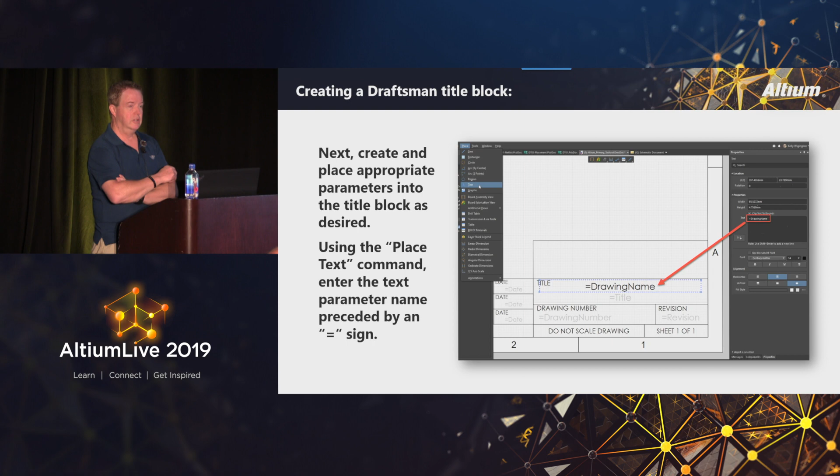Now, you'll want to do your zones in there as well. Oh, let's first talk about the parameters. Add the parameters to your title block template so that everything is formatted there, the size, the font, location, everything that you want. You want to put your parameters in there, of course, with an equal sign so that you can fill them in a tabular format, which we'll see later, rather than having to enter them on each individual sheet as you might otherwise.

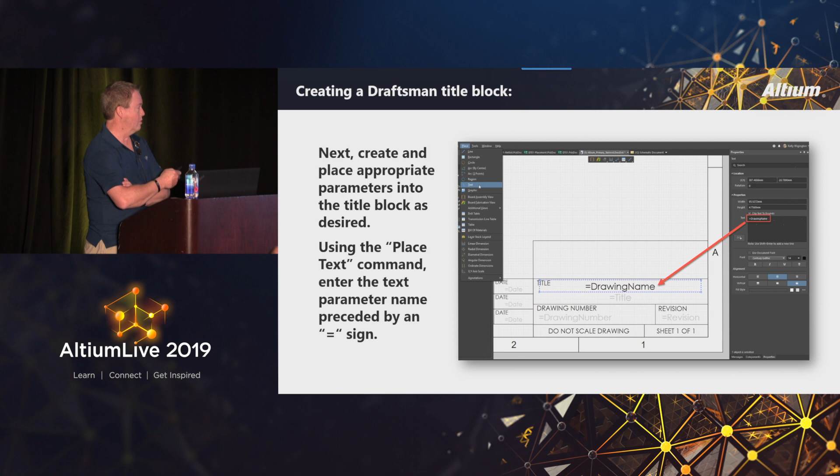All right, now, when you add your own custom parameters, and we're going to talk about there's four different kinds of parameters. You can use system, project parameters, such, but if you're doing your own parameters, this is the Windows dialog box that you use to do so. And, oops, I hit the wrong button.

Up here, you just put in an equal sign. You first click on this little icon here. That gives you a field where you put in the equal sign. It'll show you the system parameters that are available, project parameters that are already available and built in. You want to avoid using duplicate parameters because that can cause some confusion down the road. So first check and see, like in this case, where we're putting in a revision, check and see if there's already a system parameter revision in there so that you don't duplicate it as a user parameter.

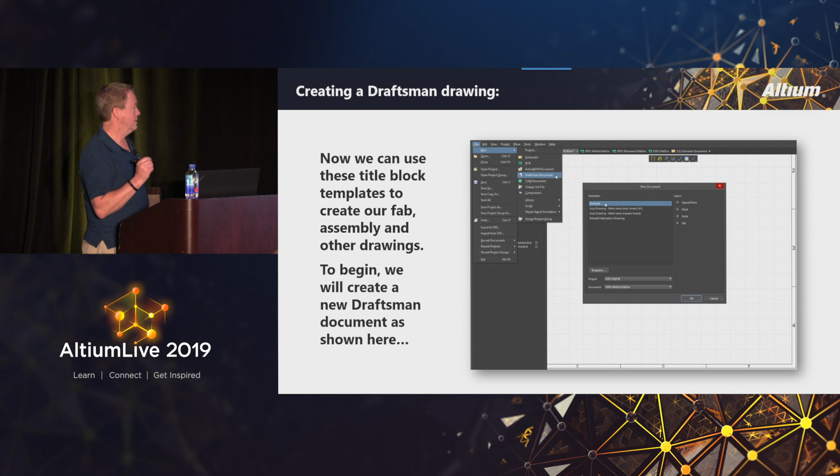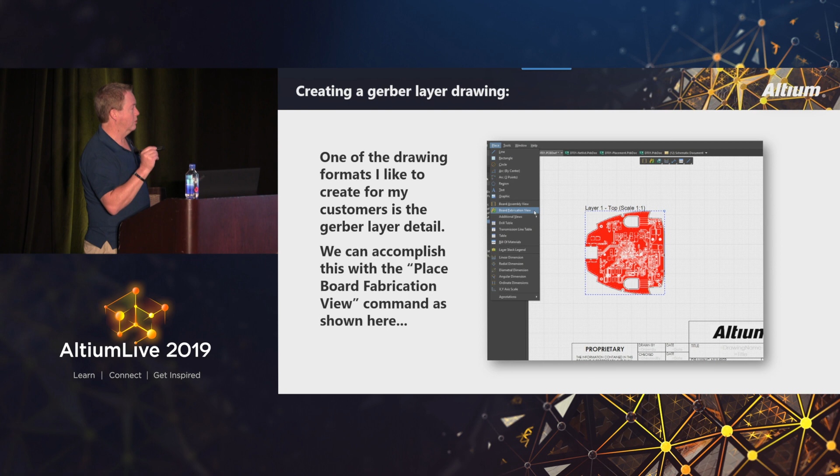But first we're going to do kind of our Gerber Layer stack up here. So we just say place and board fabrication view. That's a little bit misleading to me, but anyway, that's how you put in one of your board layers. And then in the next screen, we have, okay, interesting thing, most of you already dealt with this.

When you're in Draftsman, the property format is a little different than we're used to otherwise from the pull-down menus at the top. You control everything from these properties over here on this list, and there's so many different options. You just need to go in and kind of kick the tires and try different things out to see what works for you.

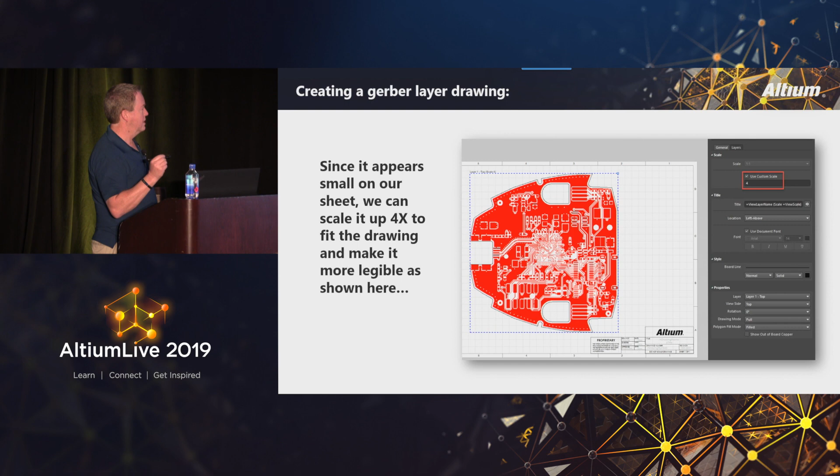Here what we've done is we brought it in at a 1-to-1 scale. It didn't fit our sheet very well. We're going to increase the size to 4x scale so that it fits our sheet. And then the next thing we're going to do is, if you like black and white documents, which is pretty typical if you're going to replicate them, you go into the second tab here in your Properties dialog box.

Gosh, I'm really shaking today. I guess I must be nervous.

And you can go change the color to black or any other shade that you want to. So if we call this our Gerber Draftsman document, then this is showing what our top layer Gerber is going to look like to the fabrication shop.

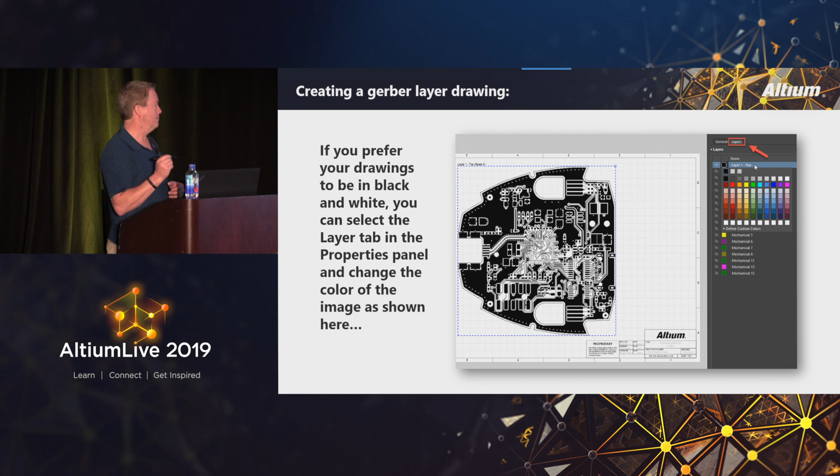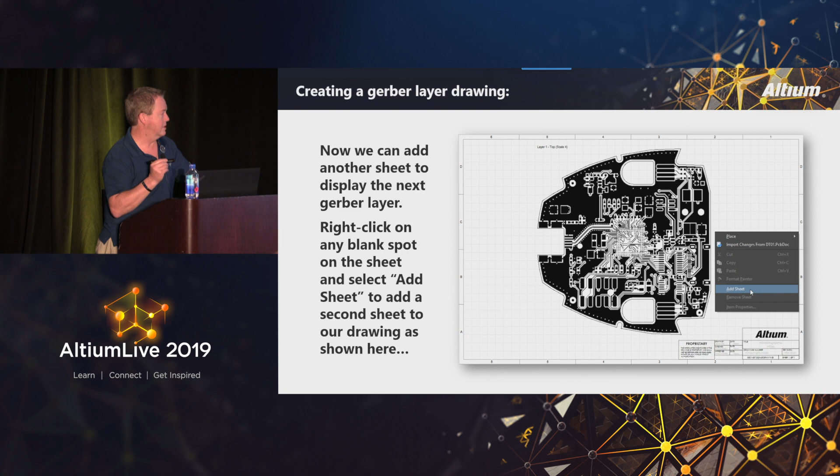Next thing, we want to do a second sheet for our other subsequent layers, and we just click anywhere in the white field around this, and the pop-up context-sensitive dialog box pops up, and we just say add a sheet.

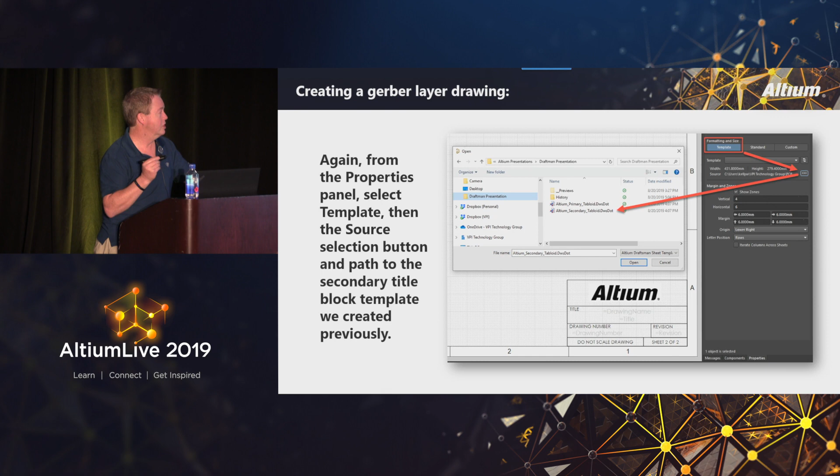So now the second sheet appears, and now we have to go back in and say, okay, I want to link my secondary title block template to my second sheet and those subsequent. So we go in and just change that in the parameters. It's going to be in the sheet parameters here that you can do that. And now you can go back to the menu and say place another fabrication detail.

It's easier, now that we've already sized it, to just copy the top layer that we placed previously to the second sheet. It's already the size we want. And then we just go in here in the properties. Notice I've got this selected. From the properties, we can go in and say, okay, now I want to see layer 2 ground.

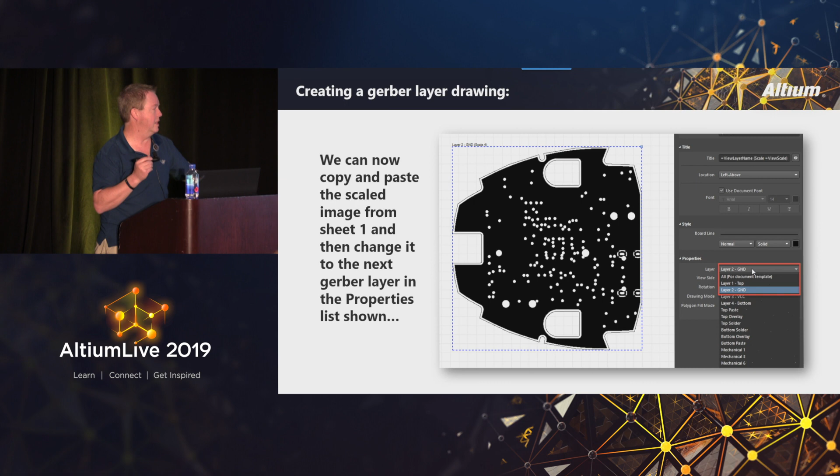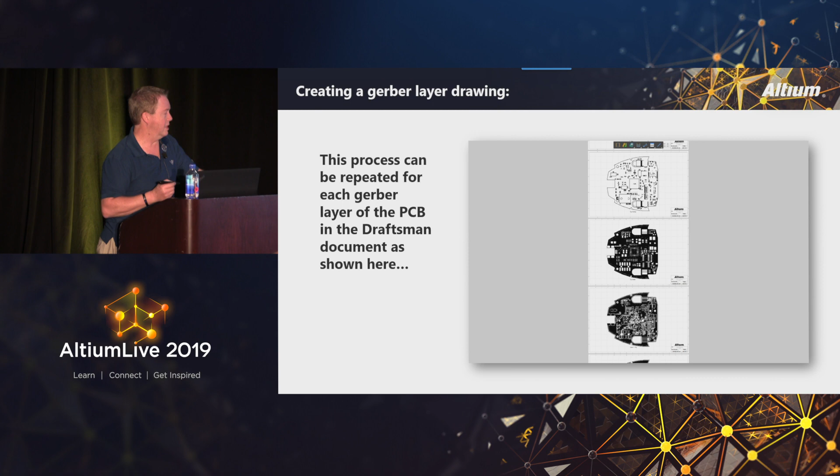And we just repeat that process for the rest of the Gerber layers in our board, so that anybody who views or prints that out can just see what our stack up looks like from silkscreen, solder paste on down to the bottom silkscreen. So that makes a useful drawing for someone to just inspect all the Gerber layers in a hard copy or a PDF. Okay, that's all there is to that.

Now we're going to populate the title block fields. You're maybe familiar with, for the sheet parameters, you just will do those from the properties box that will pop up here on the right. If you want to do them globally for the entire project, all the documents, then you go back to the top menu, project, and project options.

This is where we have all these different tabs. You go clear over to the parameters tab over here, and now it'll first present you with a blank screen here. You simply add a parameter, and you need to make sure that these match the same text spelled out exactly as you created them in your template.

So if you see, the drawn by and date code down here, they have to correspond with what you add up here. And then once you add those, you can go ahead, put the values in here, and they will appear on every sheet in every drawing that you have linked to that particular project. Really quick, easy, helpful thing to do. Yes? You can also copy them from a previous project as a block and paste it. Just do a Control-V. Okay.

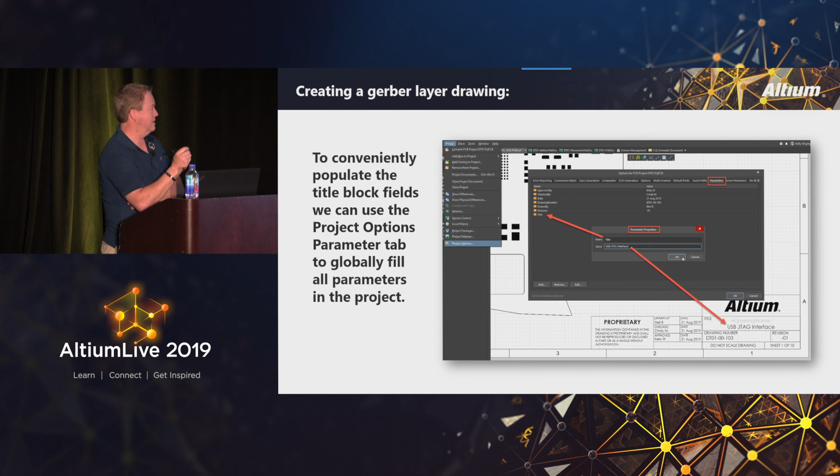Okay. And as I mentioned, because this one is not sheet specific, but document specific, we title this Gerber Layer. If we put our title in the project, as I just demonstrated, that title would appear on our fab drawing, our assembly drawing, all those. So that's why we have this one just separately here in our parameters panel for this particular sheet or document.

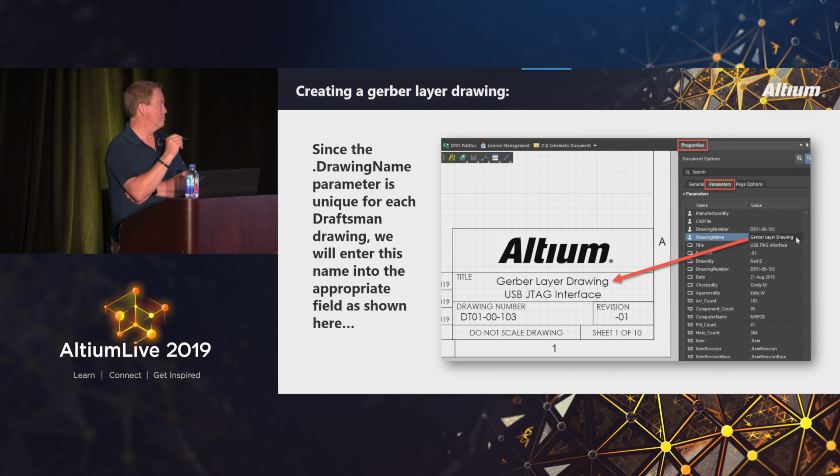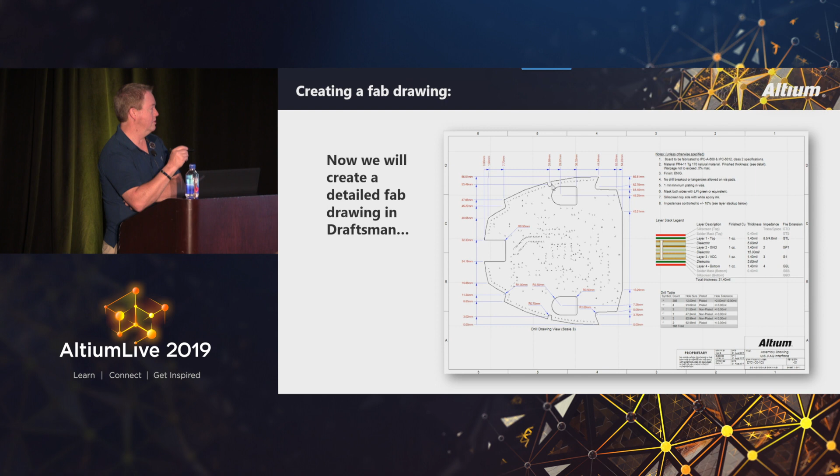Okay, now let's create a really nice fab drawing in Draftsman. Now, this is the format that I like for my fab drawings, and I'm going to show you how to accomplish that. So first, again, we start out with a blank template, and you can use that place Draftsman document command that I showed earlier. From now on, if I just did my Gerber drawing, I would just copy it, save it as my fab drawing, and then I would delete out all the layers in there, and then just go and create my fab drawing in there.

Now you see here that I have gone in and changed the parameter for the document as the fabrication drawing. And now we start out by placing, under place additional views, the drill drawing view, and that places a replication of our PCB, and it has symbols or characters representative of all the drilled holes we have in the PCB. I'll show you how to manage those later on. Again, I just did this 3x scale so that it would fill the sheet where I wanted it to.

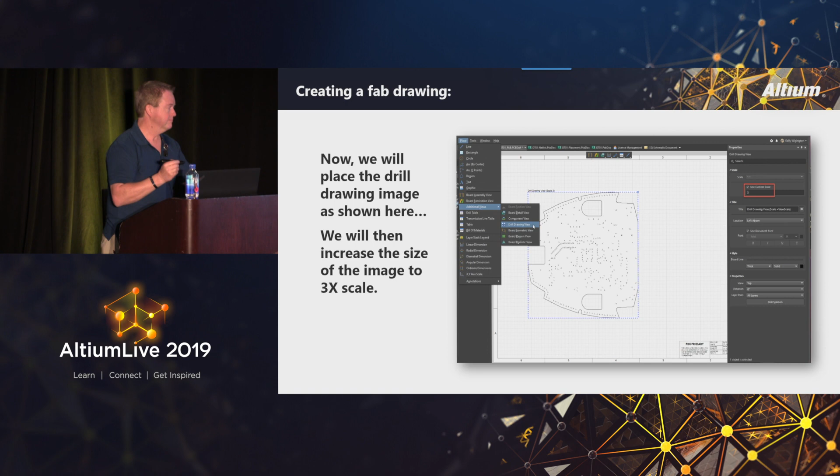Okay, next we want to dimension the drawing, and you have a lot of different dimension options in here. I like the ordinate dimensions where you start at a 0 point and then just work your way up. It's a little cleaner when you have a lot of notches and edges to dimension in your drawing. You can also do radial dimensions, all kinds of things. Just go under place, and these are all the dimension options that you have down here.

Now, the interesting thing that sometimes gets you when you place a dimension is it may say 0 on a couple of them, and then 1, 2, and you go, wait a minute, I need some resolution here. So by default, it just puts it in with no numbers behind the 0. So then you need to go here in this menu and change it to a precision of 2 or 3 decimal points, depending on if you're dimensioning in inches or millimeters. You can also do dual dimensions, inches and millimeters, and set the precision independently for each one. But it really gives you a nice detailed dimension drawing.

You can also reset your preferences. You can go to preferences for this particular menu and reset it all there. Thank you. Yes. Go to your preferences under Draftsman, and you can set all the default preferences you want, and then that saves you the trouble of having to mess with all these every time you create a new dimension drawing. Thanks for that.

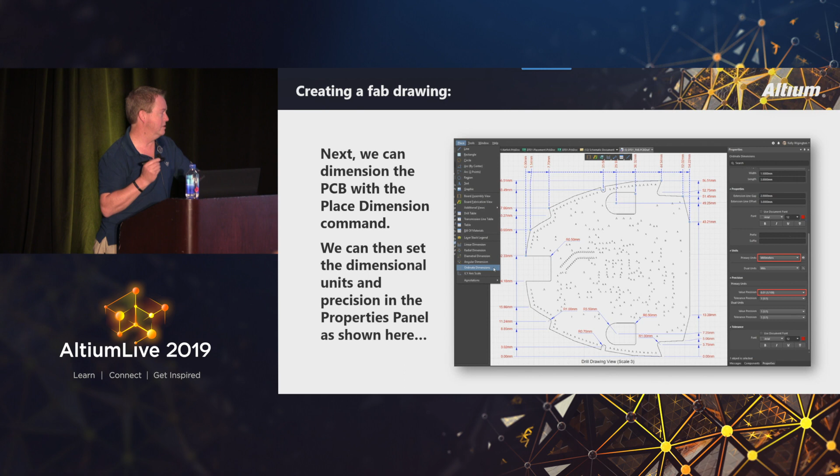Okay, now we want to add our preferred fab notes here, and this is pretty easy. You can copy and paste your favorite notes in there. The one thing that's kind of unusual about this is that you need to paste them in line by line down here. You can't edit them up here in the text box. You have to add them bullet point by bullet point down here in this dialog box. But it does space them nicely for you, gives them numbers. You can add circles or triangles over your numbers so you can reference other details if you want to. But just copy your standard notes in there and you're off and running.

Okay, now here is the layer stack table. Place, layer stack legend. This is the default way that it comes in, and as I pointed out, again, you see a lot of zeros in here, and you're like, wait, what's with my thickness? That's just because the default doesn't contain any decimal precision on that.

So once you place it, you can go into the properties for that and you can set a lot of different options. Go in and set your precision. Also for the different views, you can set it to a compact view, which instead of a big tall sandwich, kind of compresses it down. It automatically spreads these lines out here with all of your descriptions for the layers.

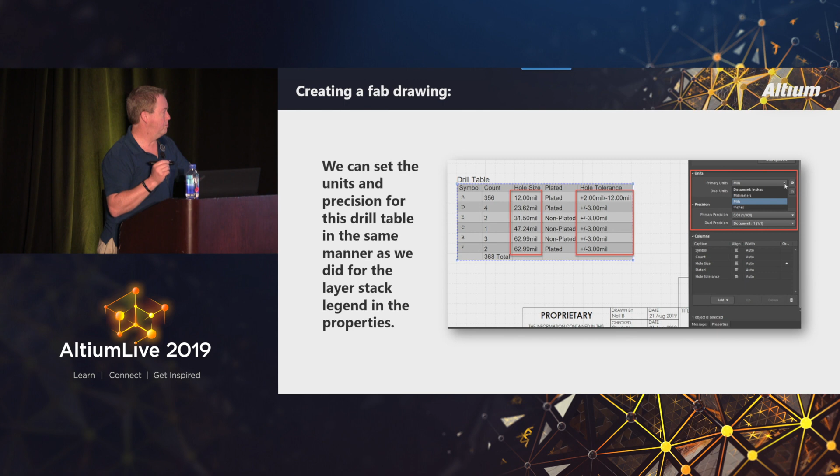Okay, now the options that you have for your drill chart or table here is you can go in, click on this link, it'll bring up this dialog box. You can go in and group by these different options here. You might need to just experiment with a couple of different things till you see the sorting and the order and the columns that you want. And then it will, by default, come in with a lot of crazy symbols in here.

Symbols are useful. I prefer to use alpha characters, so I go in and select them by size and then change this for the symbol from just a star or whatever to an A. That way, if the fab shop calls and says, hey, we've got a problem with this particular drill, they can reference it by an alpha character, rather than saying this crazy octagon-shaped star-looking thing. So that's my philosophy there.

I have a quick question. Yeah. So I may be misremembering this, please correct me if I'm wrong. When I place a drill table into Draftsman and it auto-generates symbols for it, I've noticed, at least on mine, that when I place another drill table in the PCB space itself, it auto-generates a different set of symbols. I know you can manually change those symbols. Is there a quick easy way to make sure those symbols are in sync? Not that I'm aware. Is there anything in preferences that let you do that? I haven't found any other way.

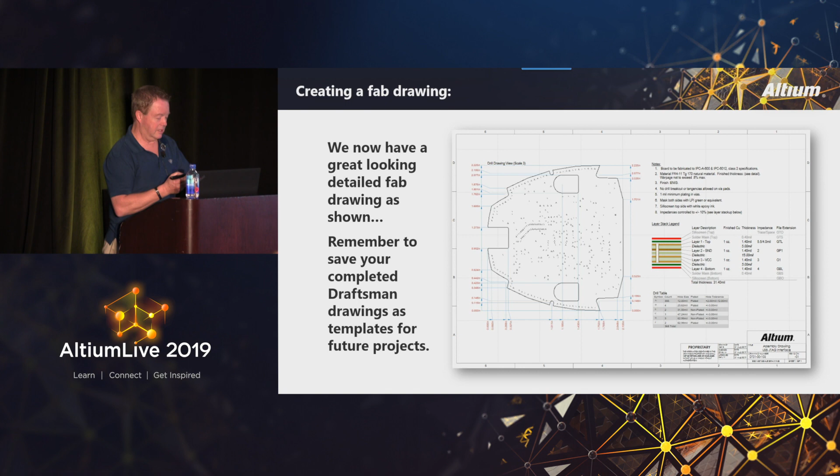Okay, so now we have this great looking fab drawing, and I'm quickly running out of time, so we're gonna go over to the assembly drawing. This assembly drawing is great. I love it because like many of you, we've had to use a mechanical layer to do a duplicate silkscreen outline for all of our components with an embedded reference designator in the middle so that when we create our assembly drawing, we can have all the designators appear at the centroid of those components.

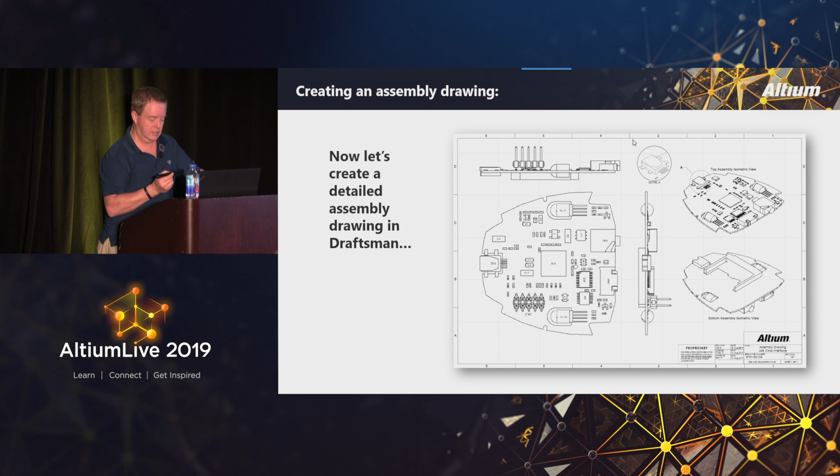Now, with Draftsman, you no longer need to do that mechanical layer for your outlines. You can use a couple of different things. I'll show you here in the next slides. Again, we're just going to update our parameter here to say assembly drawing. I've just copied the fab drawing, called it the assembly drawing document, and then we're going to just update our assembly information here. So now we do place, board assembly view.

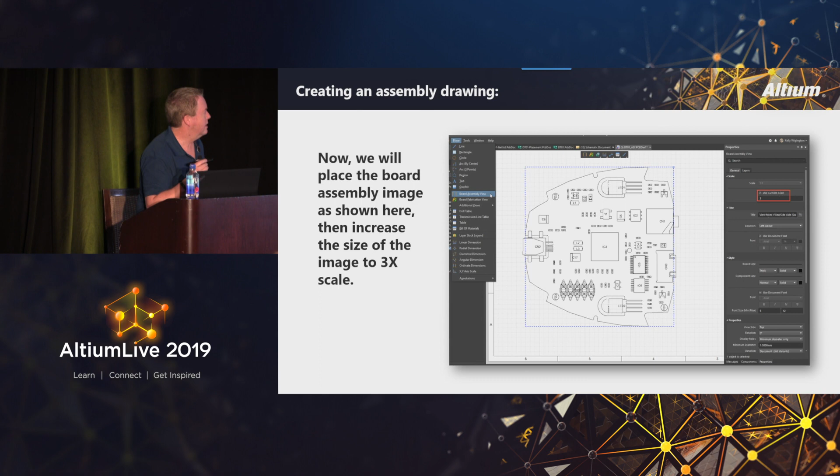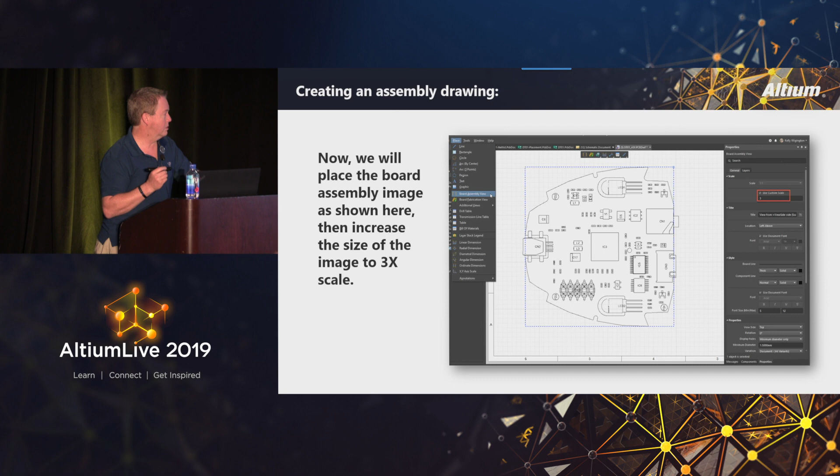It comes in just like this. Mostly it'll look pretty good. Some situations that we're going to look at here, there will be some problems that we need to take care of. I increase it to a 3x scale so that it appears large on the sheet.

Now, how many of you like to use 3D models with all of your components in the PCB? I want to see a lot of hands go up. You know, when that first came out, it was like, okay, this is kind of cool. It's a lot of extra work, and it's just sort of a glitzy thing.

But now I am a firm believer in adding those models because besides just looking really cool, it allows you to do a lot of clearance checking. It allows you to do modeling in SolidWorks. And by the same token, Draftsman uses those outlines in your 3D model by default to create the assembly drawing. And they look great, don't they? So that's another reason to use 3D models in all of your components when you create them.

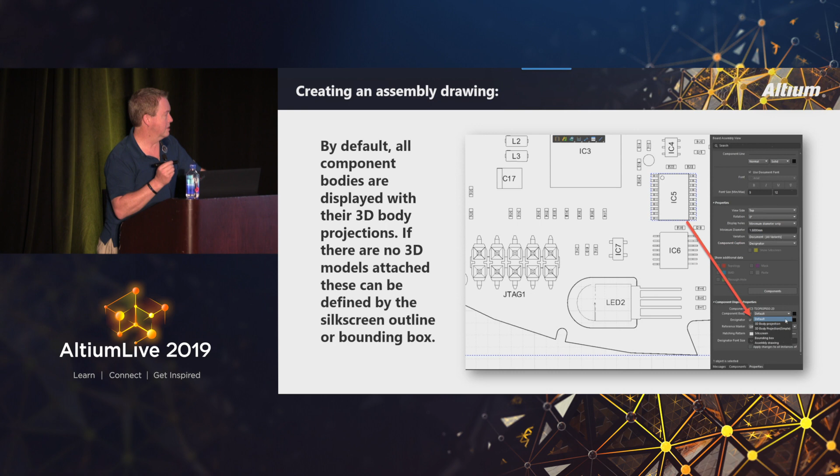But for the discrete resistors and capacitors, it kind of obscures some of the text designators inside there.

Is that my alarm that I need to quit? Okay, heard somebody's text message.

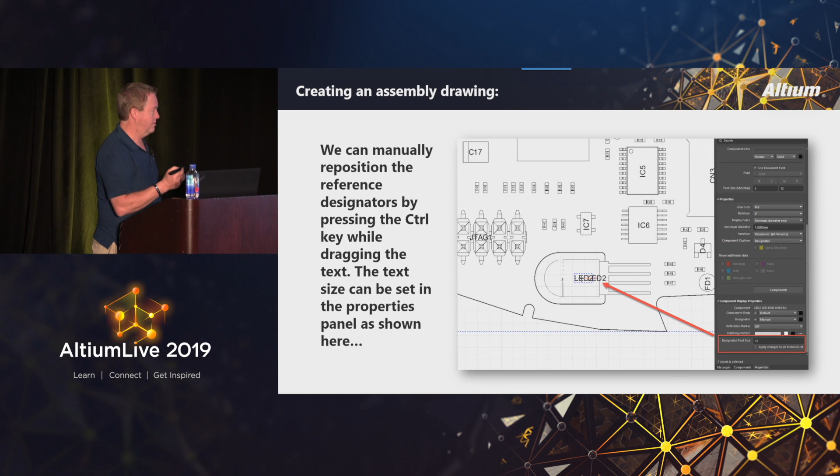Okay, now, in this case, we have a designator on the LED that's sitting on top of some of the other lines. And this is something that I didn't learn for a long time. I picked it up from somebody else, saying, man, I wish you could move the designators individually. Of course, you can move them down here in the parameters, inside or outside the component outline. But he goes, oh, just hold down the Control key as you drag the reference designator, and piece of cake. So that was really sweet how you can individually customize those.

Now, the nice thing is you can use this link here to globally go into a tabular data format, to change all your resistors, all your capacitors at once into a different outline. Again, for those, the 3D model outlines don't work out too well. Now, the important thing is up here in this option dialog box, by default it'll be BOM, which doesn't really do you any good for what you want to do. You want to change these all by footprints. So you select footprints. Now it sorts all of your components by footprint.

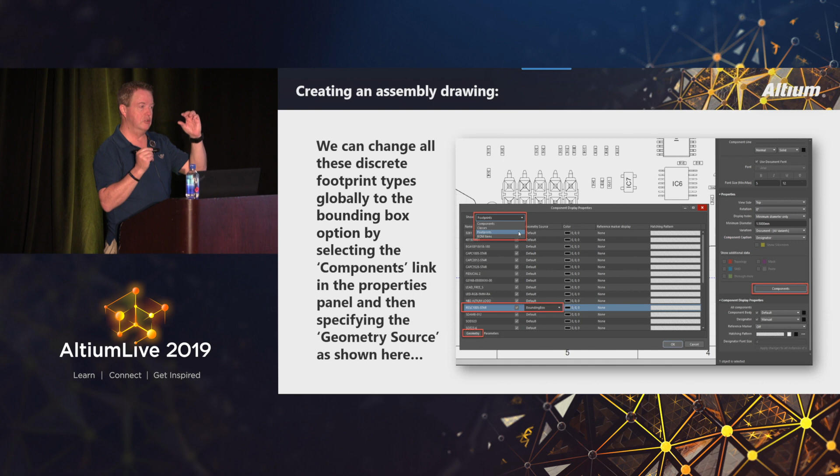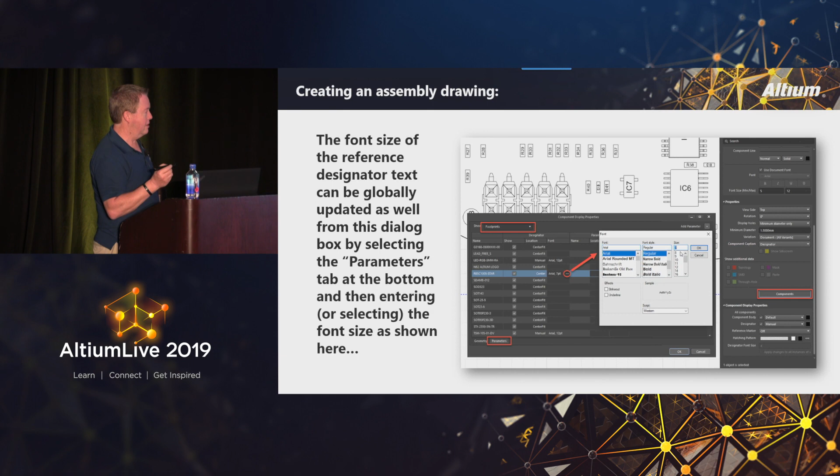Then you can go in individually for each footprint type and change the geometry source, which by default will be the 3D model. You can change it to a bounding box, which gives you a bigger outline around your capacitors and resistors. From there, you can go to this next tab down here at the bottom, from geometry to the parameters, and then you can find the ideal text size for all of your 0402 resistors, maybe another font size for all of your 0603, and when you're finished with that, you end up with some really nice looking assembly information here for all of your components.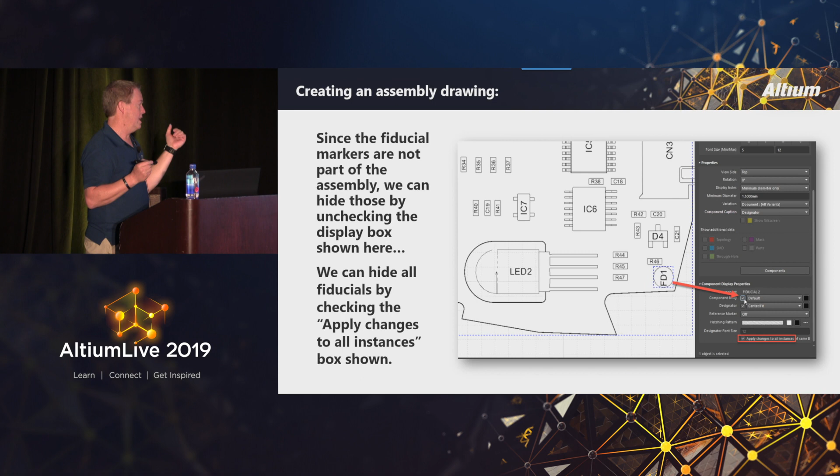The fiducials, you can go in. If you check this box at the bottom there, it's outlined, it says apply changes to all instances. And that means for all fiducials, we can just go in, click the eyeball, uncheck them, turn them off. We don't need to have fiducials visible on our assembly drawing anyway.

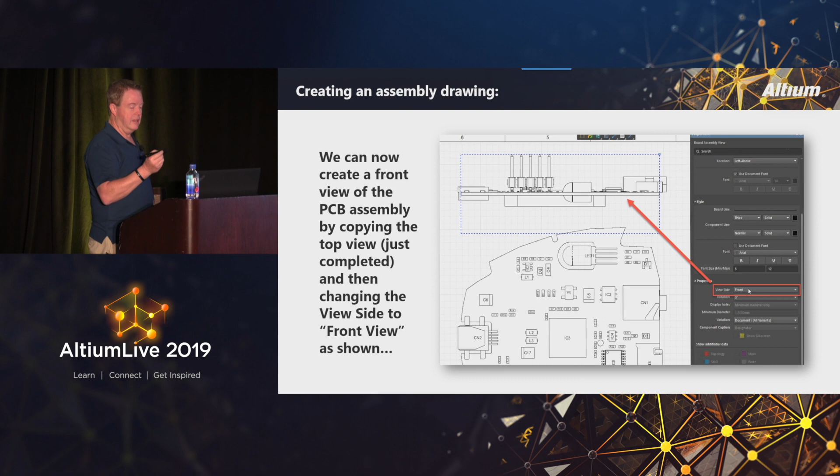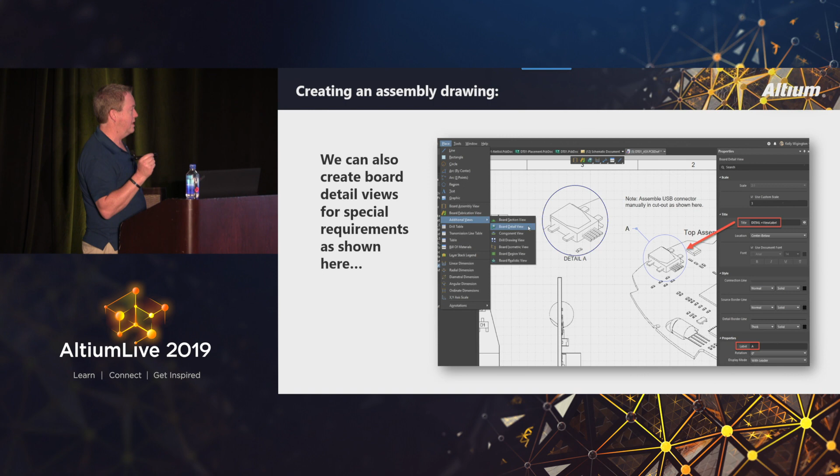Now from there, you can go in, like I just copy this. It's already scaled, but then I just go in and you can change the view so that gives you a side view. You can do an ISO perspective view. And again, I'm going to go through this pretty rapidly, but if you just get the PDF slides, you can do all this step by step on your own. As I mentioned, it now added this realistic view for the top and bottom side of your board. I do that as part of my assembly drawing, and customers really like that. But there's so many options.

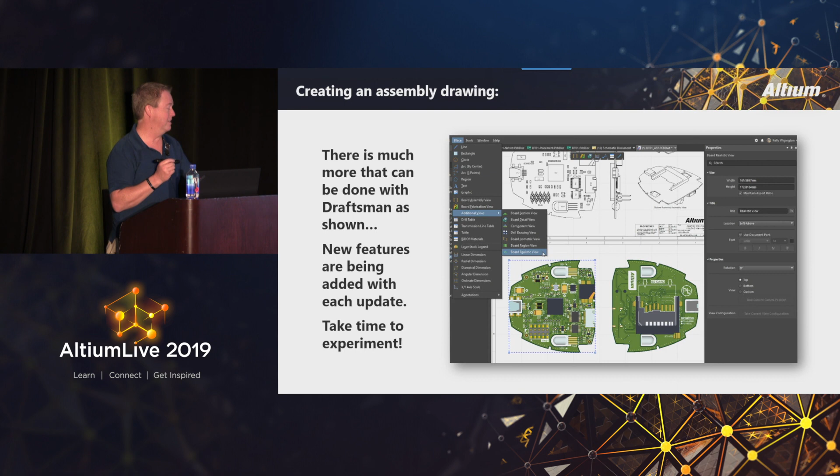I just challenge you to go in on a free Friday afternoon, when you don't have anything left to do the rest of the day. Well, that doesn't ever happen, does it? Okay, just tell your boss you've got to hijack some of your time to go in and play around with some of the features. Just go in and try those things.

Now, really quickly, once you have created these Draftsman files, I hope you've already experienced the beauty of the OutJob containers, because you can link your Draftsman documents now to your OutJob file so that with the click of a button, you can immediately generate the PDF for your assembly drawing, your fab drawing, any of those. So your documentation is a snap.

That is the end of my presentation. My quote is, you can do amazing things with Altium Designer if you learn how to use it effectively.